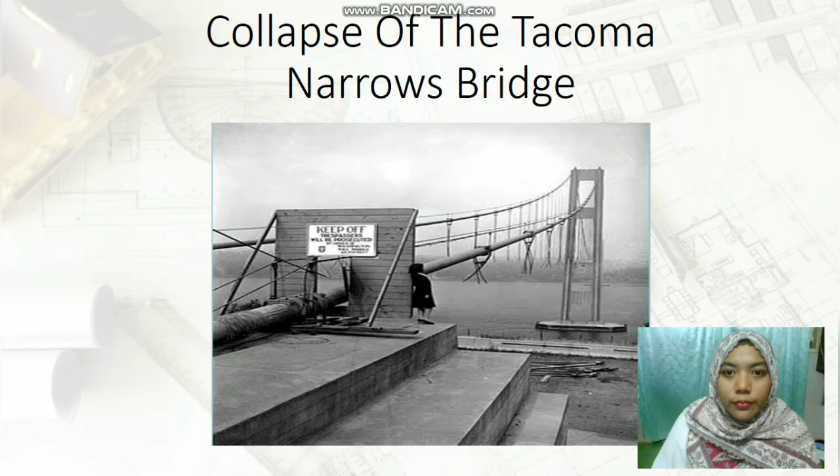Assalamualaikum. This is Engineering and Society Section 3P. We are from Group 6. I am Aliza Azmi. Now I will present about our case study, the collapse of the Tacoma Narrows Bridge.

The Tacoma Narrows Bridge is a pair of twin suspension bridges that span the Tacoma Narrows strait of Puget Sound in Pierce County, Washington. Historically, on 7th November 1940, this bridge collapsed only 4 months after opening, due to aeroelastic flutter that happened because of vertical movement of the deck during the windy conditions.

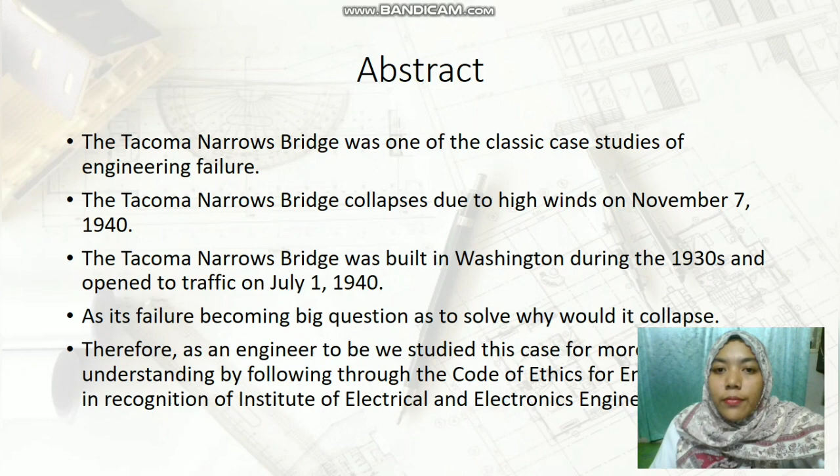As engineers, we have ethics or codes that we must follow. The codes of ethics for engineers mention that it is an engineer's duty to ensure that our designs are safe to the public. Therefore, later my groupmate will explain more about our slide presentation. Thank you.

Assalamualaikum, my name is Siti Nur Faralin binti Ismail, TG18025 Section 3P. Today I will be presenting about the description of literature of the Tacoma Narrows Bridge.

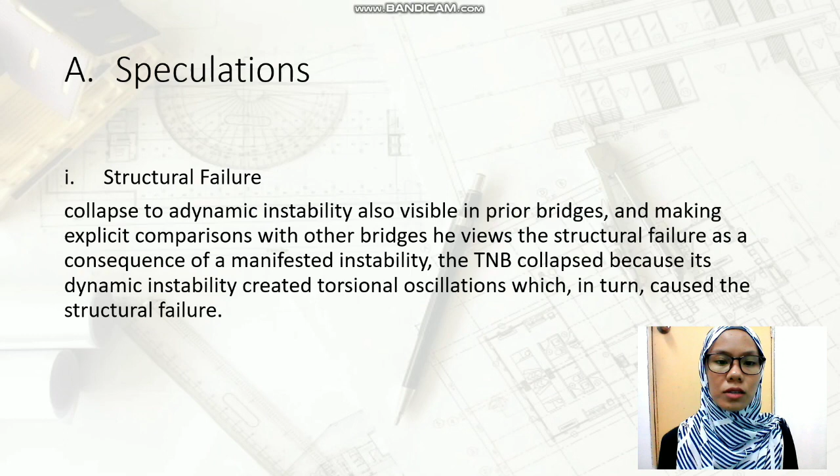Speculation. The first speculation is that the collapse of the Tacoma Narrows Bridge was due to structural failure. Collapse due to a dynamic instability was also visible in other bridges, making explicit comparison with other bridges. He views the structural failure as a consequence of a manifested instability. The TNB collapsed because its dynamic instability created torsional oscillation, which in turn caused the structural failure.

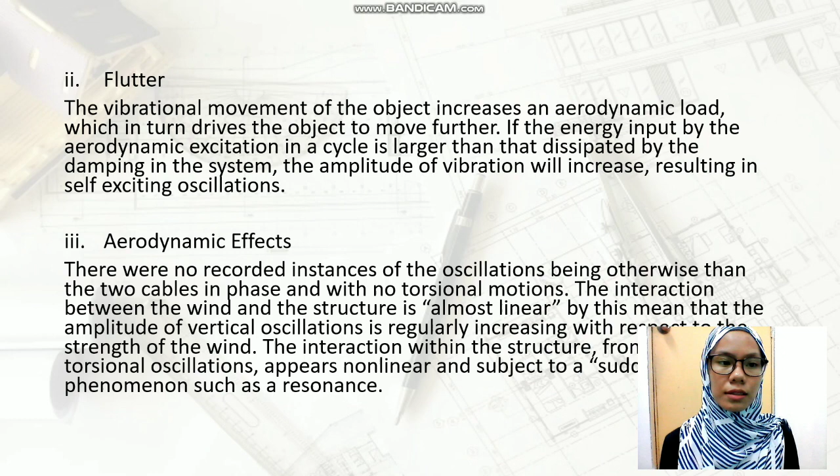The second speculation is flutter. The vibrational movement of the object increases an aerodynamic load, which in turn drives the object to move further. Afterward, the third hypothesis is aerodynamic effect. There were no recorded instances of the oscillation being otherwise than the two cables in phase and with no torsional motion.

The actual reason behind the tragedy: the overall design of the bridge resulted in a structure that was weak in torsion and moved relatively easily in the strong wind. The wind impacted the bridge, the force twisted the road bed until it hit a point where it was constrained by the suspender cables, and then it twisted back in the other direction.

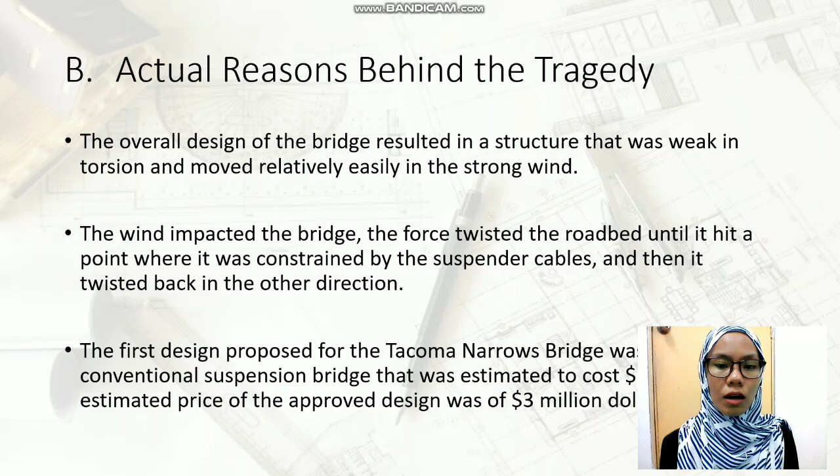The first design proposed for the Tacoma Narrows Bridge was a conventional suspension bridge that was estimated to cost 11 million. The estimated price of the approved design was $3 million cheaper.

Rescue action. 3 people attempted to save the dog. Professor F.B. Farquharson, the brave professor, managed to get to the car and even get near the dog. In all cases, they were unsuccessful. Coatsworth was awarded compensation for the loss of his car and for the contents of his vehicle. Thank you.

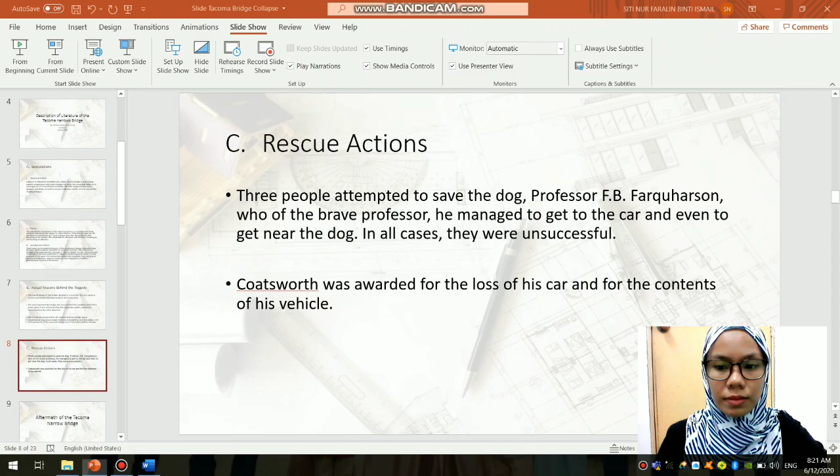Assalamualaikum warahmatullahi wabarakatuh and a very good evening. My name is Nur Ismahani Zulaikha binti Mohd Din, EC18070 from Section 3P, Group 6. We'll be presenting the aftermath of the Tacoma Narrows Bridge. Firstly, the restoration process.

Efforts to salvage the bridge began almost immediately after its collapse and continued into May 1943, steel still being a valuable commodity because of the involvement of the United States in World War II. Steel from the bridge cables and the suspension span was sold as scrap metal to be melted down. Next, the cable anchorages, tower pedestals, and most of the remaining substructure were relatively undamaged in the collapse, and were reused during construction of the replacement span that opened in 1950.

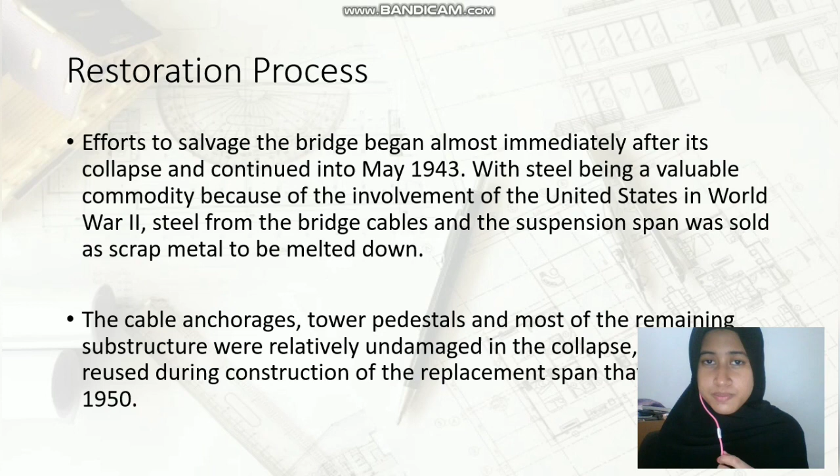Next, the news and scandal highlights. The day after the Tacoma Narrows Bridge collapsed, newspapers were full of accounts. There was news of fraud in connection with one of the policies. Hallett R. French, an agent for the Merchant Fire Assurance Company, was charged with grand larceny for making use of $800,000 worth of insurance. However, two months after that, on January 11, 1941, the newspaper reported that he had been relieved from his position. This is because he was fired.

Next, the impact on the peninsula residents. Disappointment ran high in Tacoma. The military lost its vital link between the Navy Yard and the Army installations at McChord Field and Camp Lewis for the duration of World War II. Restoring ferry service for cross-Narrows travelers got top priority. For many peninsula residents, the Narrows bridge had been a lifeline connecting their rural area to the commercial center in Tacoma and even Seattle.

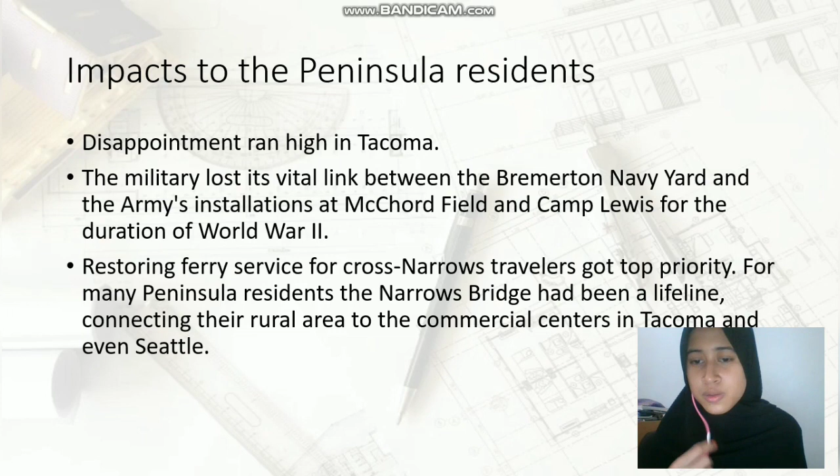Lastly, the deaths of three workers. 3 men lost their lives during construction of the current Narrows bridge. Fellow workers honored their sacrifices. In the traditional token of respect. The crew quit work for the day and went downtown Tacoma to hold a wake. The first victim was Robert E. Drake, May 24, 1948. He was a carpenter.

Drake worked for Woodworth Company. He and his fellow workers had been busy at the West Anchorage. On May 24, Drake happened to be in the wrong place at the worst possible moment. He stood below a derrick just as a cable broke, sending the boom crashing down on him.

Next, Glen Whitey Davis, date unknown. One of the iron workers who helped build the deck was Glenn Whitey Davis. He and Earl White worked on the same crew.

Lastly, Lawrence S. Stuart Gale, April 7, 1950. It was a Friday afternoon. Stuart Gale was working on deck construction, helping to connect trusses in the roof support system. Workers faced the greatest danger during the deck construction phase.

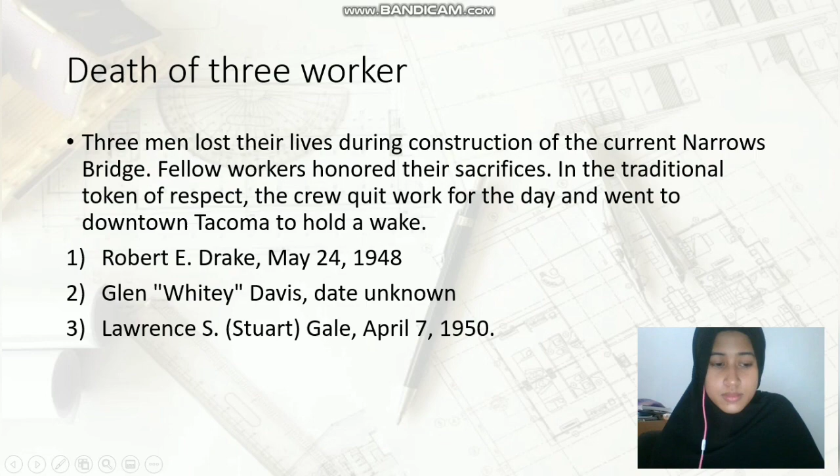Now, let's take a look at analysis and recommendation. The first is utilitarianism. What is utilitarianism? Utilitarianism holds that actions are good if they serve to maximize human well-being. The emphasis in utilitarianism is not on maximizing the well-being of the individual, but rather on maximizing the well-being of society as a whole, and as such it is somewhat of a collectivist approach. For example, the building of a dam is acceptable, although it affects the ecology and local households, since it benefits society with drinking water and avoiding floods.

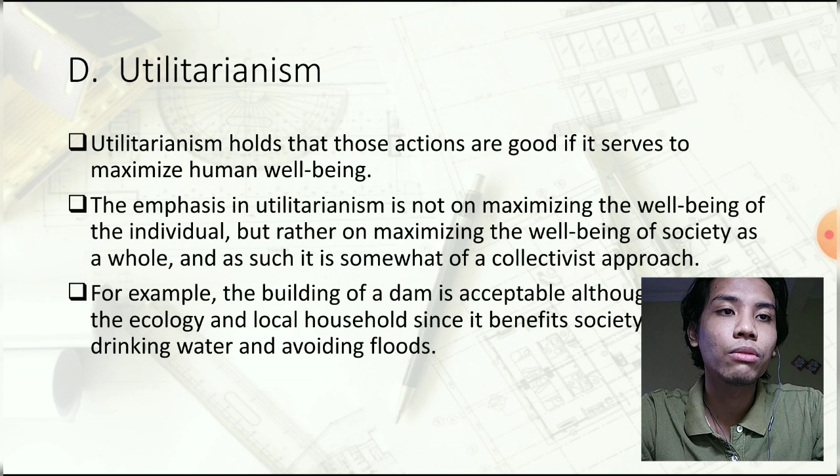Actually, there are two main flavors in utilitarianism. The first one is act utilitarianism. Secondly, it is rule utilitarianism. Act utilitarianism focuses on individual actions rather than on rules. Rule utilitarianism holds that although adhering to rules might not always maximize good in a particular situation, adhering to moral rules will ultimately lead to the most good.

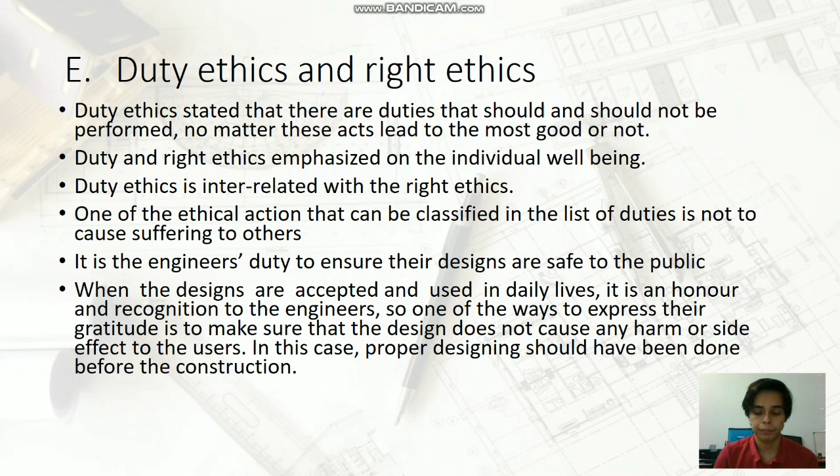So the next one I'm going to talk about is virtue ethics. What is virtue ethics? Basically, virtue ethics is interested in determining what kind of people we should be. In other words, it is something where you can appraise an action, whether it is good or bad, based on the character trait supported by the action. One of the best examples for an engineer to show good ethics is taking responsibility. A responsible engineer can be deduced from the incident. It could be a mistake made either on purpose or unintentionally.

Virtue is often defined as moral distinction and goodness; a virtuous person exhibits good and beneficial qualities. In virtue ethics, actions are considered right if they support a good character, I mean good traits, and wrong if they support bad character.

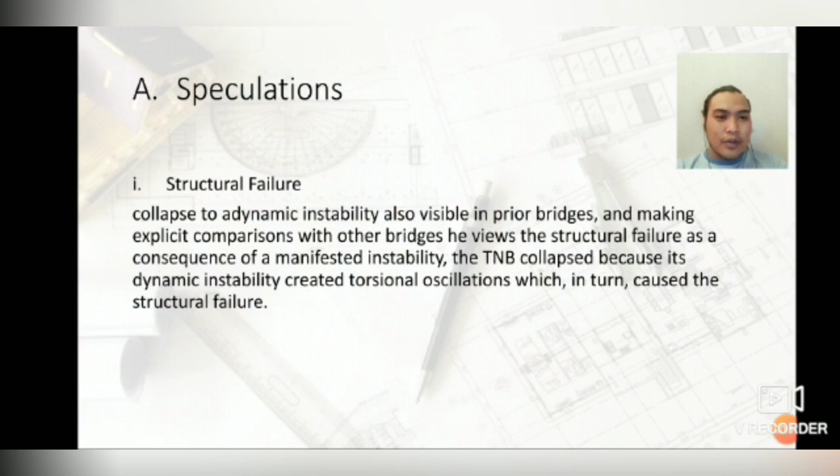Now, let's go to the duty ethics and rights ethics.

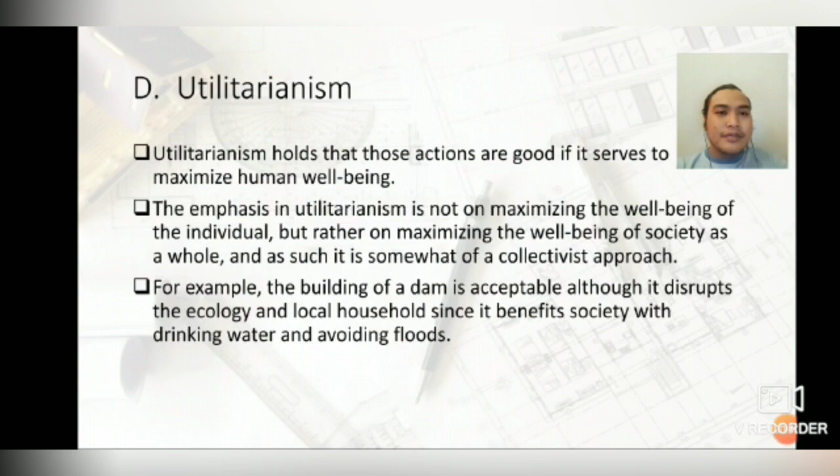Okay, as you see on the screen, duty ethics and right ethics. Duty ethics state that there are duties that should and should not be performed, no matter whether this act leads to the most good or not. Duty and right ethics emphasize the individual well-being.

Duty ethics is interrelated with right ethics. One ethical action that can be classified in the list of duty is not to cause suffering to others. It is the engineer's duty to ensure that their designs are safe to the public. When the designs are accepted and used in daily life, it is an honor and recognition to the engineer.

So one of the ways to express their gratitude is to make sure that the design does not cause any harm or side effect to the user. In this case, proper designing should have been done before the construction.

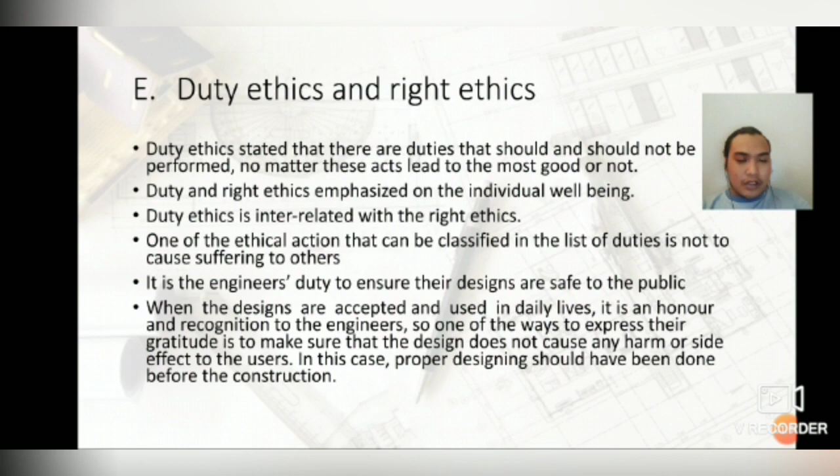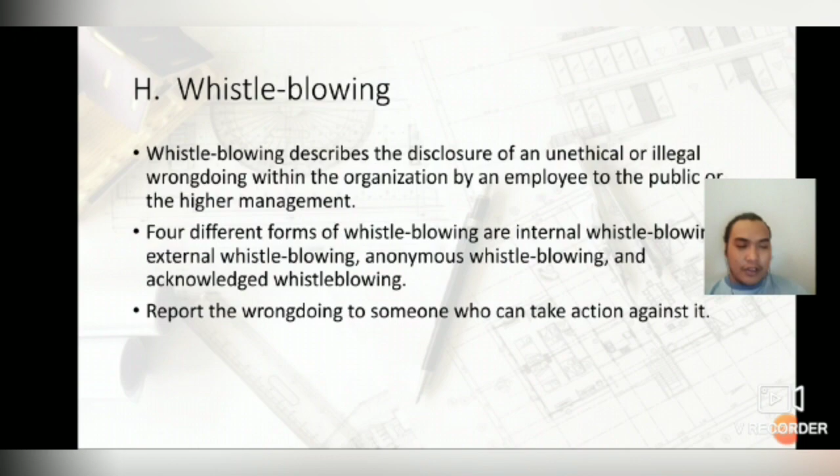Now we continue for the next part about the Code of Ethics. There are 4 points for the Code of Ethics related to this topic. The first one is NSPE: engineers shall at all times strive to serve the public interest. The second code is IEEE: to improve the understanding by individuals and society of the capabilities and societal implications of conventional and emerging technologies, including intelligent systems.

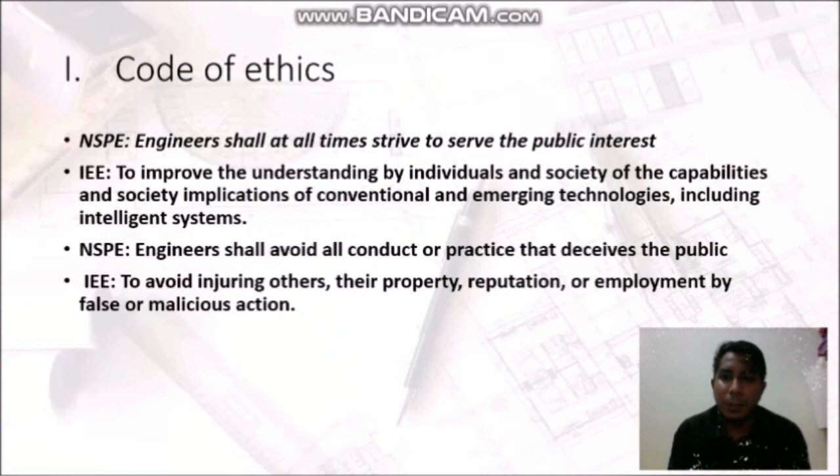The third code is NSPE: engineers shall avoid all conduct or practice that deceives the public. And the last code is IEEE: to avoid injuring others, their property, reputation, or employment by false or malicious action. We go to the first code, NSPE. Engineers shall at all times strive to serve the public interest.

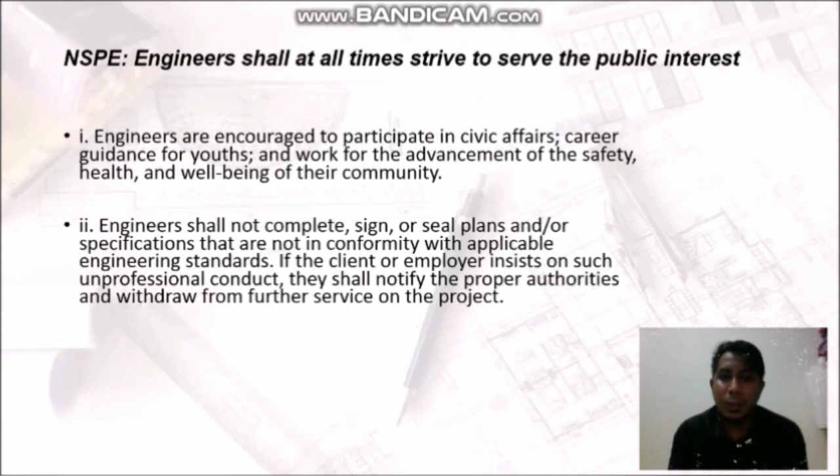Discussion 1 is engineers are encouraged to participate in civic affairs, career guidance for youth, and work for the advancement of the safety, health, and well-being of their community. The second discussion is engineers shall not complete, sign, or seal plans and/or specifications that are not in conformity with applicable engineering standards. If the client or employer insists on such unprofessional conduct, they shall notify the proper authorities and withdraw from further service on the project.

Second code, NSPE, engineers shall avoid all conduct or practice that deceives the public. Engineers shall avoid the use of statements containing a material misrepresentation of fact or omitting a material fact. Second, consistent with the foregoing, engineers may advertise for recruitment of personnel.

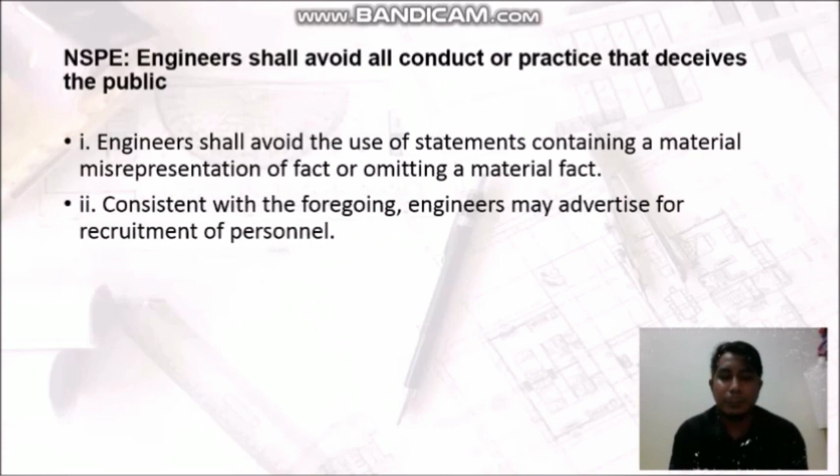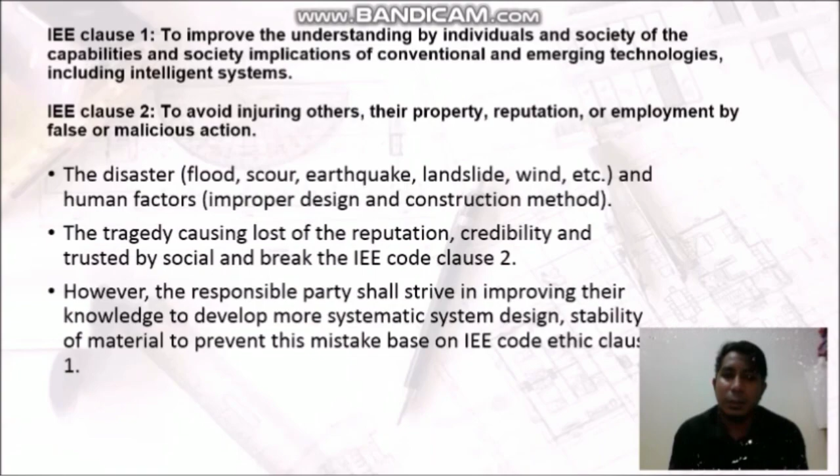I will present the conclusion that we can draw from the Tacoma Narrows Bridge collapse tragedy. Many of the ethical issues can be learned by the engineer as an experience to avoid repeating the mistake. As an engineer, the theoretical fundamentals must be strong. The failure of a bridge construction needs to be addressed from pre-construction stage planning and execution up to the operational stage. The lessons learned from failure will help evolve knowledge and technology. The history of failure is an invaluable record of human experience.

As engineers, we relate this tragedy to NSPE and IEEE. NSPE, the National Society of Professional Engineers, stands today as the only organization committed to addressing the professional concerns of licensed PEs across all disciplines, while IEEE is the world's largest technical professional organization dedicated to advancing technology for the benefit of humanity.